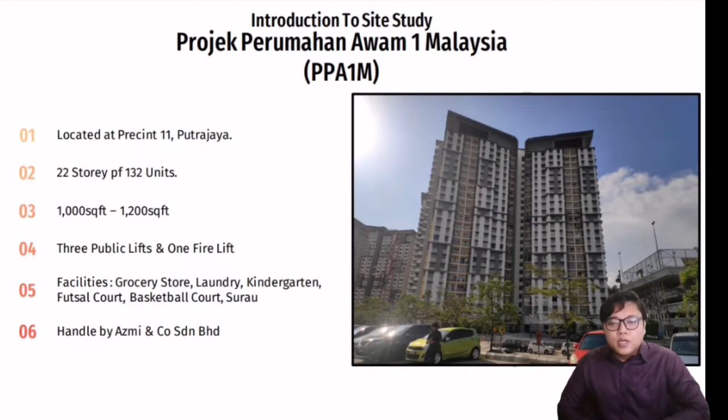This presentation covers the water supply system and sewerage system in PPA1M Palma apartment.

The water supply system is an indirect water supply. Clean water from outside is supplied into the ground floor water tank.

The water then flows into the main and support water tanks at the top of the building using a rising pressure pump. From these two tanks, water flows into each unit in the building.

There is also a rainwater tank located on the same floor as the main water tank, kept for future use. Additionally, water is supplied into a water tank for fire purposes.

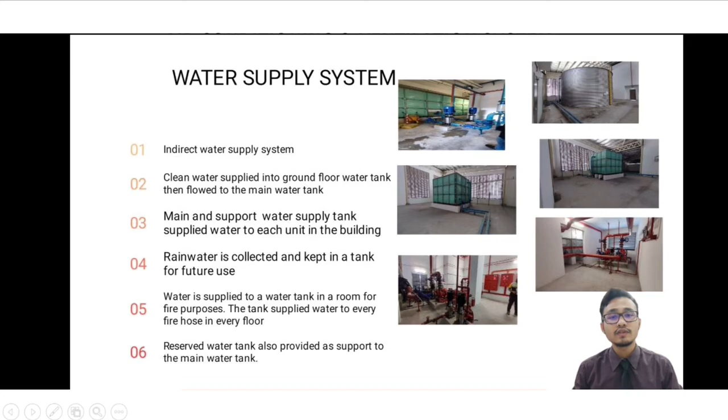The water tank supplies every fire hose on each floor. A reserve water tank is also provided as support to the main water tank.

The suggestion to improve is by adding a sensor device to ensure there is no outage of water supply. The sensor also detects water usage, leakage, and overflow.

The pros of this improvement are that it can reduce water wastage and increase the efficiency of the system. The cons are the high cost of installation and maintenance.

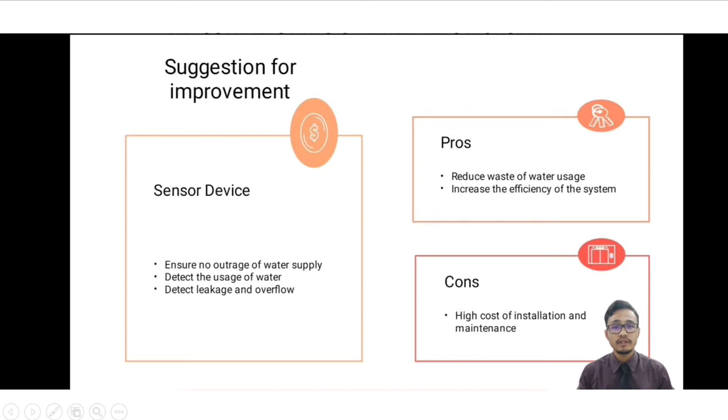The sewerage system used is a 2-pipe system, where soil waste and water waste use separate pipes and ventilation. This ensures the waste pipes can be used for a long period and can carry a lot of waste.

The sanitary drainage is a combined system. Stormwater and in-house waste are transported through the combined sewerage.

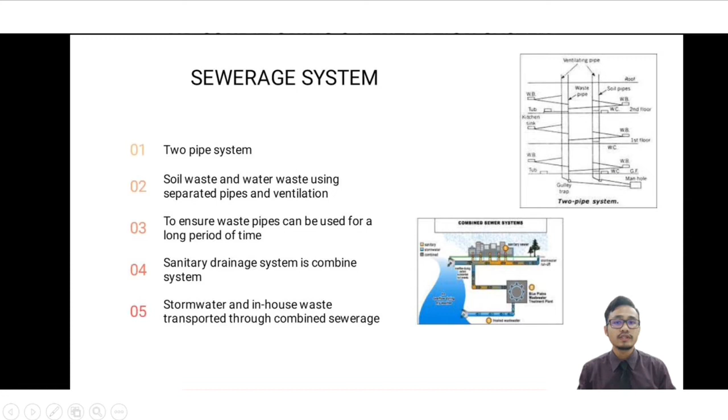The suggestion to improve is by adding an extra pipe and sensor. The pipe acts as a reserve pipe and opens when the sensor detects the drainage is about to overflow.

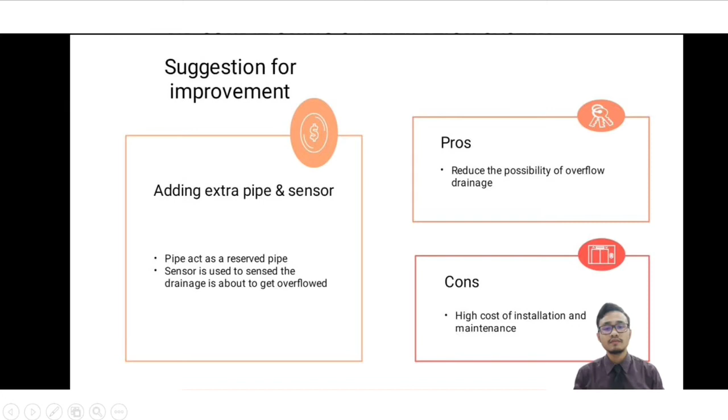The pros are that it reduces the possibility of drainage overflow since the system used is a combined system. The cons are the high cost of installation and maintenance.

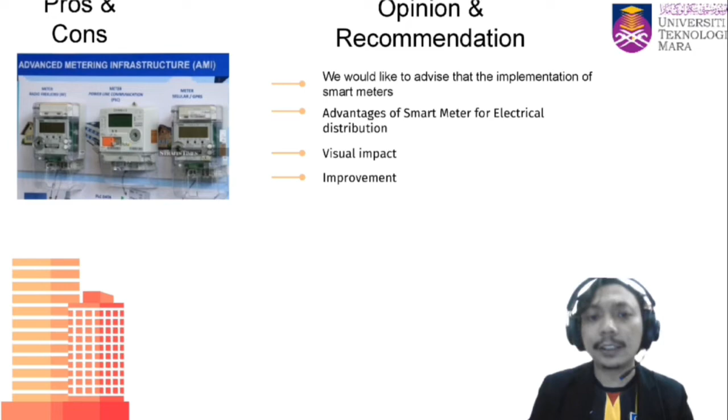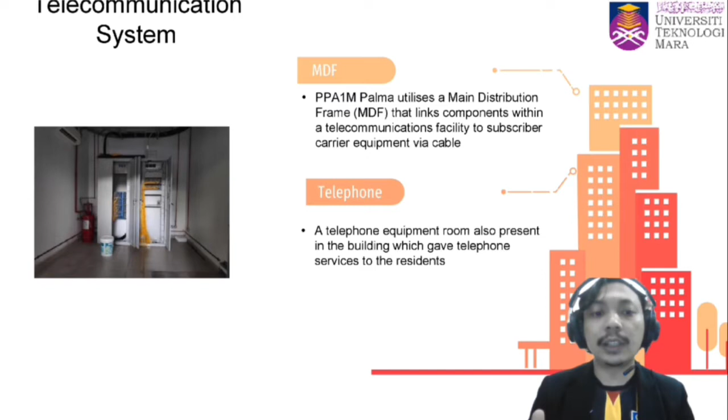Communication between staff is done through personal phones. The advantage is that the system is quick and accessible, as everyone has their own telephone unit. The disadvantage is that the system causes a higher electrical bill.

We are of the opinion that the telephone system in the building is quite old school. We recommend that the building communication system be upgraded with a better system, such as the use of walkie-talkies and so on. Thank you, and we move to the next slide.

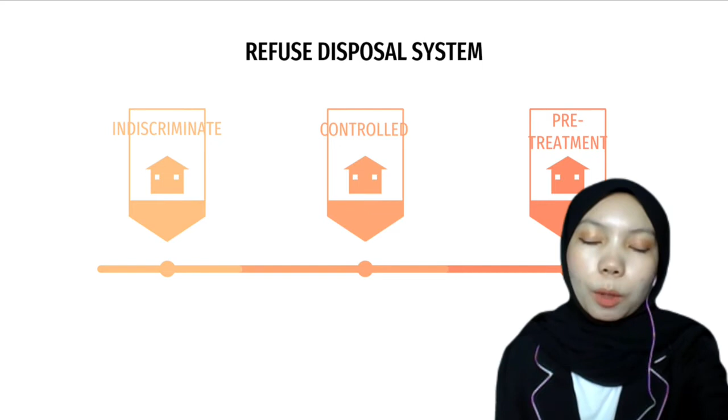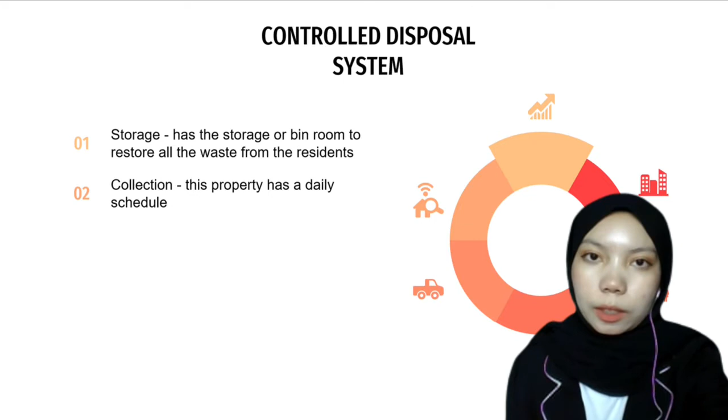I will present about refuse disposal and air ventilation system. For our case study, the property uses the controlled disposal system because it has storage and a bin room to store all the waste from the residents. As for collection, the property has a daily schedule.

The pros and cons for the control system: this system is not threatening to the environment.

For the cons, firstly, the problem of this system is that the location of the storage bin room might be hard or inaccessible for the residents.

Next, unpleasant smell. This system can also cause unpleasant smell to the property, because the bin center or bin room will produce smell due to the large amount of waste there.

Other than that, another con of this system is that occupants may not be responsible.

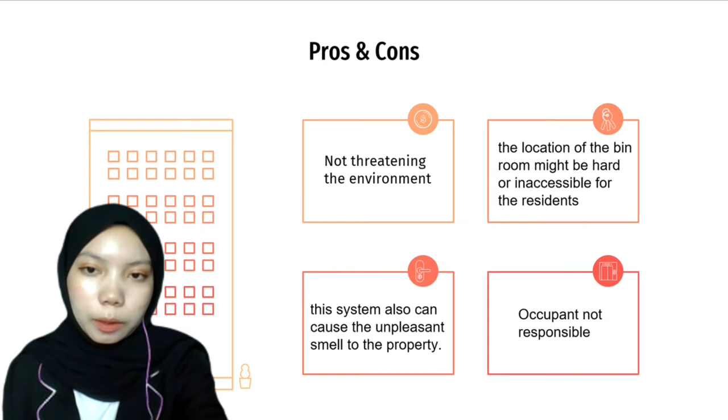Next, the opinion and recommendation: this system is suitable to be used for this building. However, they need some improvement in terms of the storage and collection parts.

Firstly, for storage, they can better manage the refuse by providing more bin centers on each floor.

Other than that, management should provide more workers to collect the waste, because a lack of workers might cause problems with waste collection.

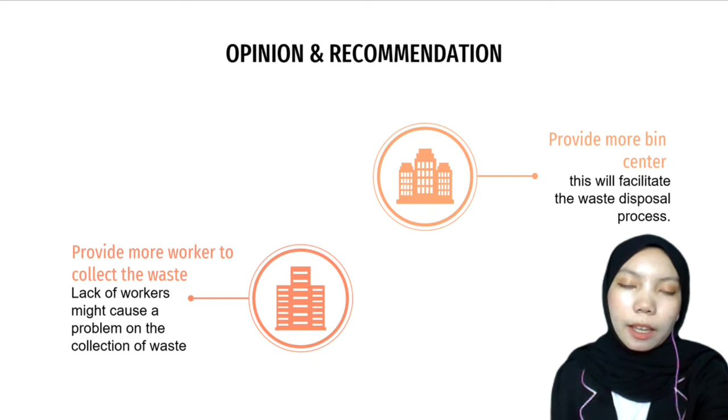Next, for the air conditioning and ventilation system: for our case study, the building uses a natural ventilation system, which only uses windows and open space to provide good ventilation into the building.

Next, we move to the pros and cons of natural ventilation. The pro is that the system saves costs and energy.

However, there are cons for this system: the weakness is that it cannot keep the same temperature in the building, especially during summer. Other than that, the residents or people in the building are also exposed to polluted air.

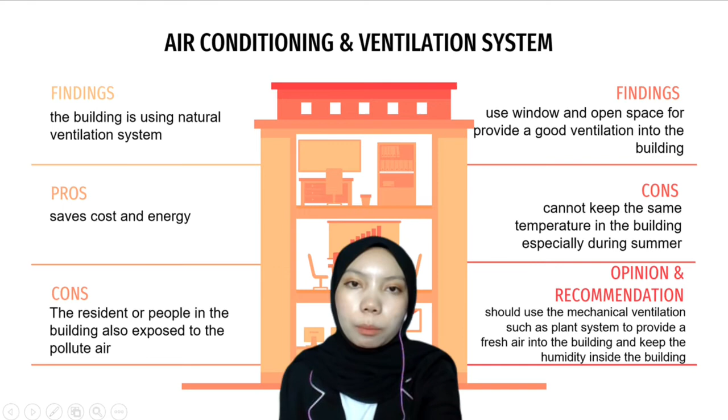For the opinion and recommendation, they should use mechanical ventilation such as a plant system, because this can provide fresh air into the building, ensure the residents' satisfaction, and improve the building's profile as a smart building.

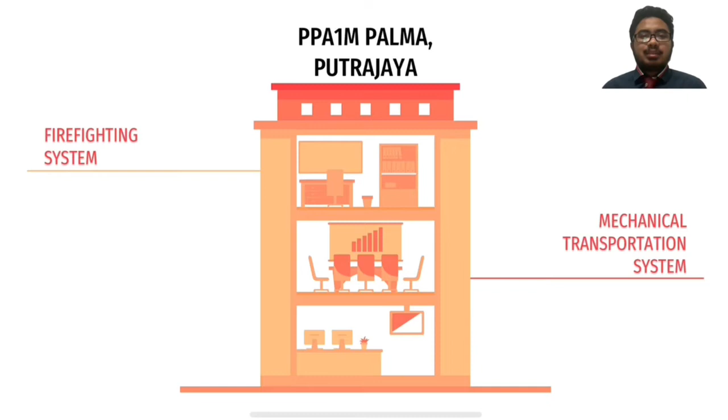For our case study, there are several active fire protection systems inside the building. Firstly, the automatic fire alarm and sensor, which helps detect smoke, fire, and other hazards, triggering sirens to alert occupants.

Then we have the fire sprinkler, which showers the area where the alarm is triggered from a specified water supply system. The third one is the usual fire extinguisher, used to stifle or control smaller fires under suitable conditions.

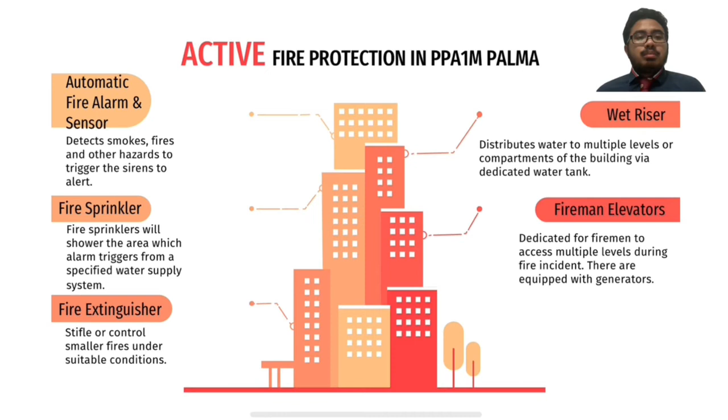The fourth one would be the wet riser, which to me is very important and beneficial as it distributes water to multiple levels or compartments of the building via a dedicated water tank that firemen can use. Lastly would be the fireman elevators, dedicated for firemen to access multiple levels during a fire incident. These elevators are equipped with generators to supply power in case of a power shortage.

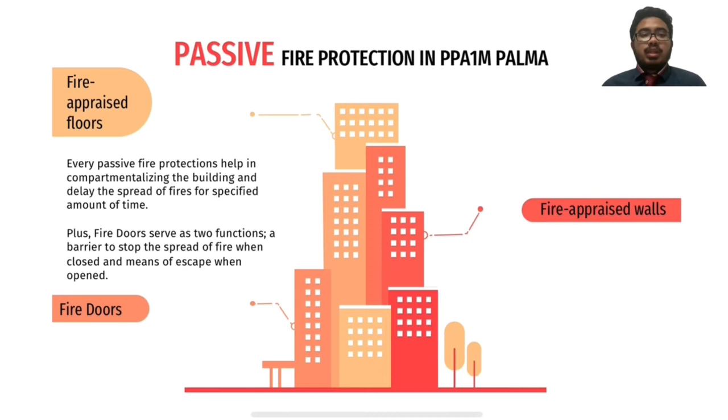When it comes to the passive fire protection system of the building in our case study, firstly we have the fire rated floors, then the fire rated walls, and lastly the fire resistant doors, also known as fire doors. Every passive fire protection item helps compartmentalize the building and delay the spread of fire for a specified amount of time, depending on the regulation and specs of each item. Plus, fire doors serve two functions: a barrier to stop the spread of fire when closed, and a means of escape when opened.

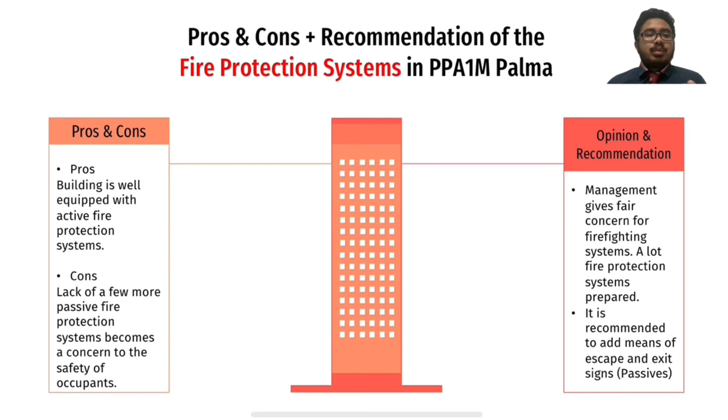Firstly, the pros of the fire protection system is that the building is well equipped with active fire protection systems. However, it lacks a few more passive fire protection systems, which becomes a concern for the safety of the building and its occupants during fire incidents. Our opinion is that the management gives fair concern for firefighting systems, and a lot of fire protection systems are well prepared for the building. It is recommended that management add means of escape and exit signs as extra passive fire protection systems for the building.

Now, moving on to the mechanical transportation system, our finding for the case study is that the buildings are equipped with 2 gearless traction elevators per block, the only type of mechanical transportation available. Let me share a bit of fact about traction elevators: they are lifted by ropes which pass over a wheel attached to an electric motor above the elevator shaft. A counterweight makes the elevator more efficient by offsetting the weight of the car.

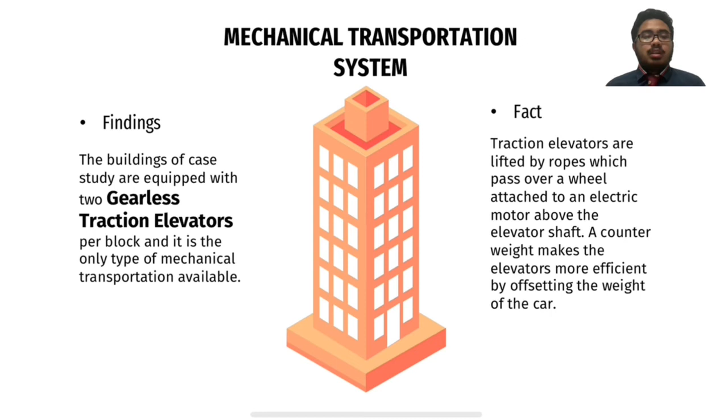Last few points for today are presenting the pros and cons, as well as opinion and recommendation, for the mechanical transportation system available in our case study. Firstly, the pros of this type of traction elevator is that it travels fast but consumes less energy, and maintenance is also fairly cheap.

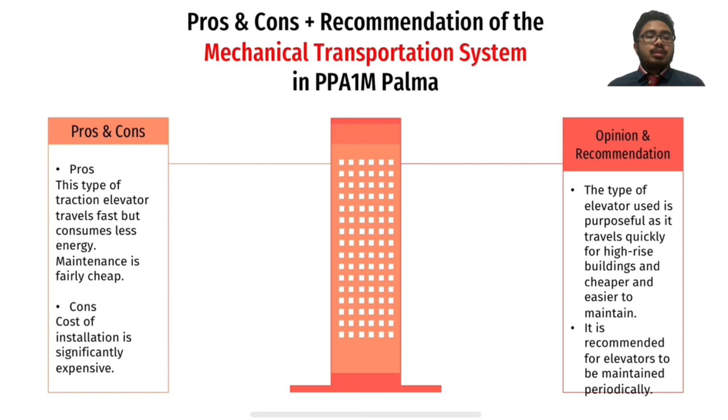Now, moving on to the cons of the transportation system, the cost of installation is significantly expensive. Our opinion is that the type of elevator used is purposeful as it travels quickly for high-rise buildings and is cheaper and easier to maintain. Lastly, our recommendation for the mechanical transportation system is for the management to make sure the elevators are maintained periodically.

Now I'm going to talk about the building security system. This building has its own security officers, and the security room is located near the lobby area. Inside the security room, there are 2 security personnel monitoring the system. There are also CCTV cameras on each floor of the building. Each residential unit also has an intercom so residents can directly report to security in case of emergency. Inside the security room, they also have 2 private intercoms that can be used in emergencies, connecting directly to the fire station and the hospital.

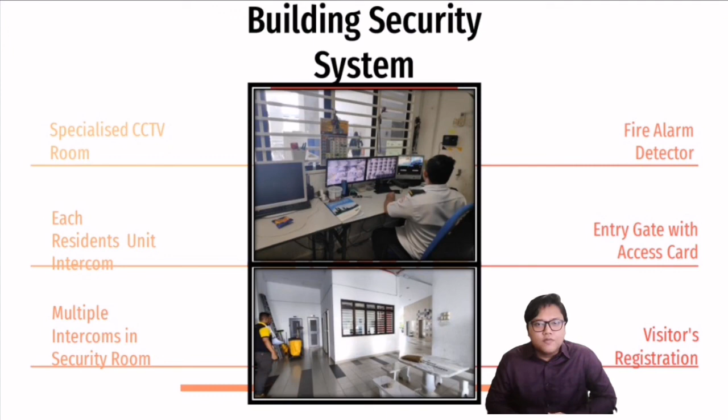In conclusion, the Putrajaya area is categorized as one of the technological cities. This is because Putrajaya is one of the planned areas, where every development needs permission from the Putrajaya Corporation before construction. Therefore, any development in Putrajaya looks neat and organized. The system used in the housing area is also very neat, where every road around the housing area is equipped with a closed circuit system to monitor the situation in that housing area in Putrajaya.